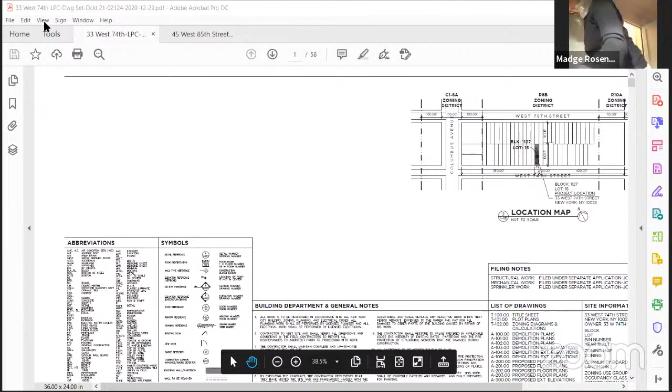So it's 33 West 74th Street. It's a brick and stone townhouse, built originally in 1889 as a group of 5, I believe. It's pretty notable, it's the building that has the wisteria growing up the facade of it. Our application is pretty much we're doing a full renovation of the house. We can convert it from a 2-family to a 1-family townhouse.

As far as exterior work, we'll be replacing windows on the front facade, changing the type from double hungs to casements. As mentioned, we're proposing a roof bulkhead to bring the stair up to the roof and have a roof terrace. Also on the roof, we'll be locating mechanical equipment up towards the front. This building has a very high parapet, so we'd be locating mechanical equipment behind the parapet. On the rear facade, we'll be reconfiguring openings and installing new wood casement windows, as well as steel casement windows for a bay window. This is all in addition to a full renovation of the interiors of the whole building.

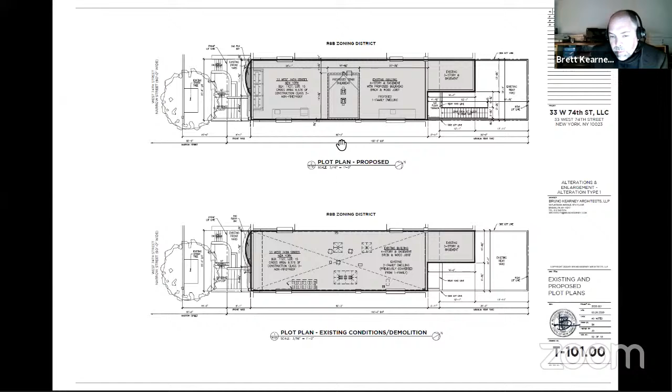If I could, you can go to the next page. This is the proposed plan, existing and proposed plot plan. In the upper plan, you see where the proposed bulkhead is located. It's set back about 26 feet from the front facade, so it's towards the middle of the building there. You can probably go to the next slide.

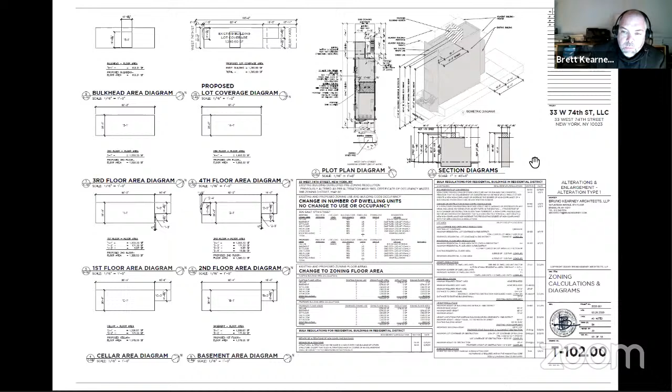This is just the zoning calculations for the building. The 3-dimensional isometric diagram in the upper right-hand corner shows the size of the bulkhead. It basically matches the height of the adjacent bulkhead on the property to the west, shown with a dotted line. Our bulkhead has a hatch pattern on it, and the adjacent bulkhead is there. Below that, the section diagram shows the sightline diagram from across the street. According to the sightline diagram, it would not be visible from the sidewalk or the street.

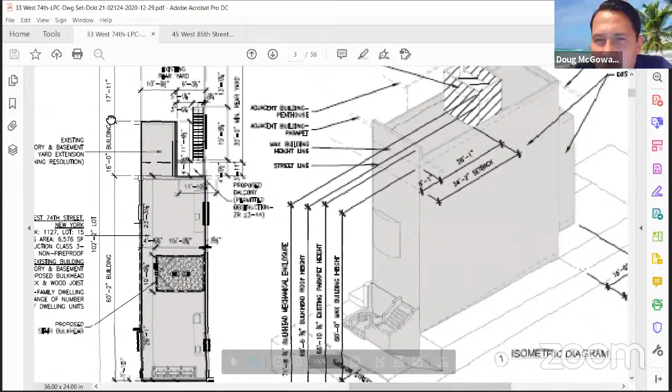Mark, could you zoom in on that a little bit so we could get a look? You said the diagram shows that it's not visible from the street. I'm having a hard time seeing it. Yeah, just scroll up a little bit more. I gotta, something funny happened there. Give me one second.

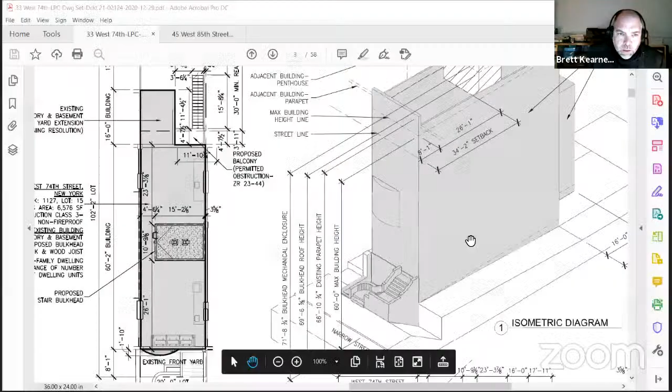So the parapet goes how much higher than the line of the building? It's about 5 to 6 feet. And we're kind of going to adjust the roof line to get a little bit more height, lower the slope of the sloping roof a little bit. Right now there's some bracing on the wall; we're going to take the bracing out and replace it with a steel structure that will act as both bracing and dunnage for the mechanical equipment. So basically the mechanical equipment will be right up against that.

Do you have a mock-up up there? Because I was there today. Yes, yes. I didn't see it. I couldn't see it from either side of the street.

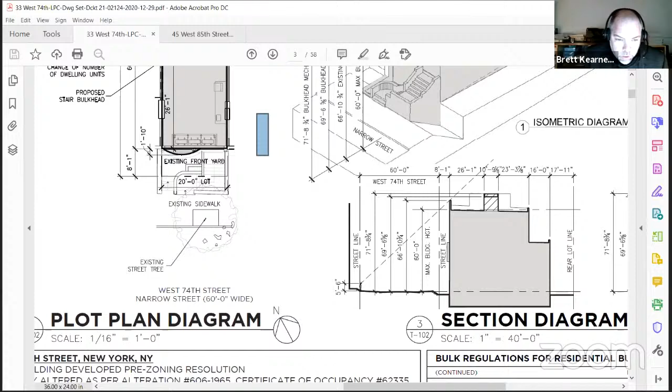No, there's photos. We built the mock-up a couple of months ago, and Landmarks never actually came out to see it. We photographed it, and then with the bad weather, we had to take it down. Well, it's still up - the frame is up. We took some of the plywood off because of the high wind alerts from the building department. I submitted photographs of the mock-up as part of the package, both from the street and from up there so you can see it.

So that's what's on the screen. There's the diagram - you can see between the roof and the top of the parapet it's about 5 to 6 feet. And that's from the other side of the roof. So the parapet is 5 or 6 feet? We have another section further down with more detail. It's a fairly wide building, right? Relatively - it's 20 feet wide.

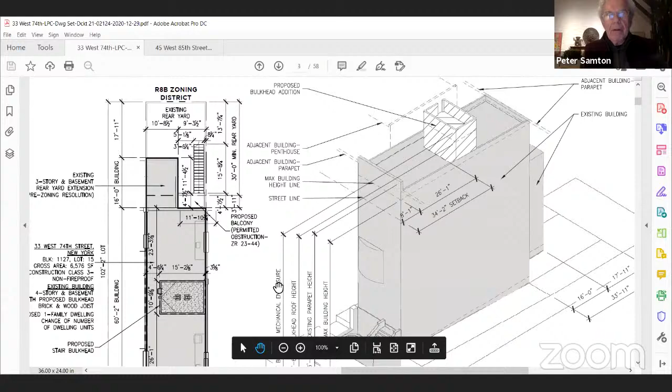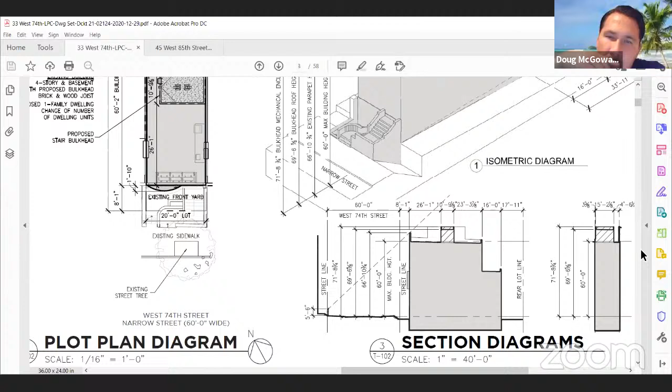How high is that new bulkhead? It doesn't give a dimension. Peter says 71 feet, 8 3/4. So the building height is 60... No, I mean from the roof to the top of the new bulkhead. That's about, let's see, 11 maybe 9 feet. 11 foot 8? So I'm calling out to the top of the parapet - 71 feet to there, it's 11 to 12 feet. Not to be picky, but is it 5 or 6, or 11 or 12? There's a measurement - it's either 11 feet, 8 and 3/4 inches to the parapet, which we're required to have either a parapet or a railing on top of the bulkhead.

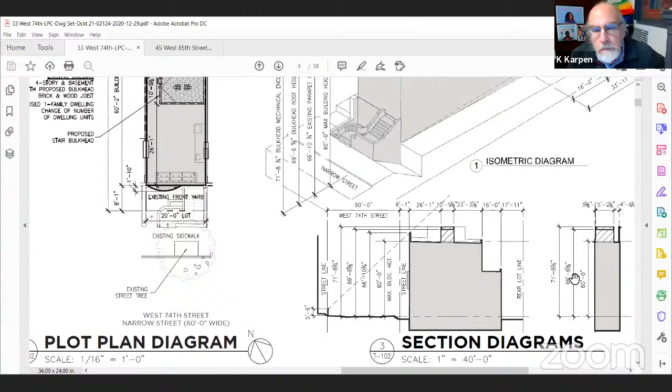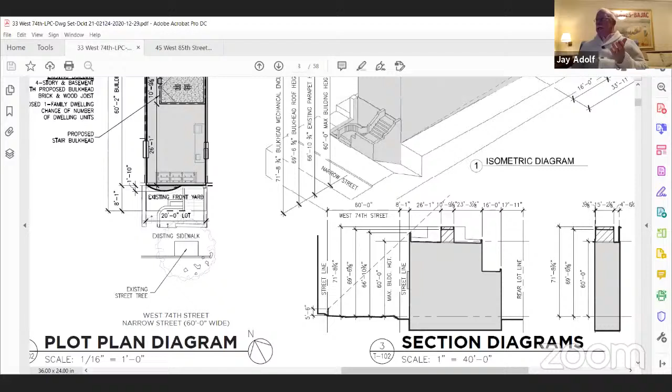So the roof line is actually 9 feet - looks like 6 and 3/4. Correct, so it's just under 10 feet to the roof line, and then the parapet adds another couple of feet. It's either a parapet or a railing - we don't have any equipment up there, just some ventilation on top. So did you answer the question about the height of the bulkhead from the roof to the top? It's 11 feet - you could take the measurements and subtract. So is it 11? The last I heard was 11 foot 8 3/4. Brett's figuring it out, looking at the drawing and calculating. It's 11 feet, 11 to the top of the parapet on the bulkhead.

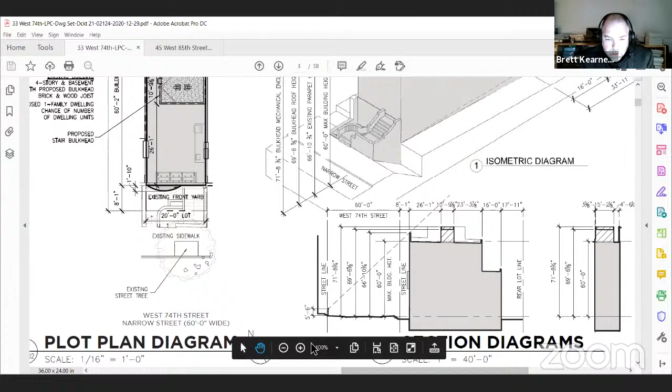So we can scroll back - is that specifically for an elevator? No, it's for stair access. But you will have an elevator in the building as well. Yes, but the elevator is not going to the roof, it's only going to the 4th floor. That's the top floor. But if it's for stair access, why do you need 11 feet?

That seems very high for access to a stair, which normally you'd need about 8 or 9 feet. Well, we have about 8'6" ceiling - let's see, we have a 9-foot ceiling there, and then a couple feet for mechanical ductwork above that ceiling, because we have some exhaust ductwork going above that ceiling into the roof. And then we just have a foot, or a 21-inch parapet around the perimeter to hide some of that ductwork.

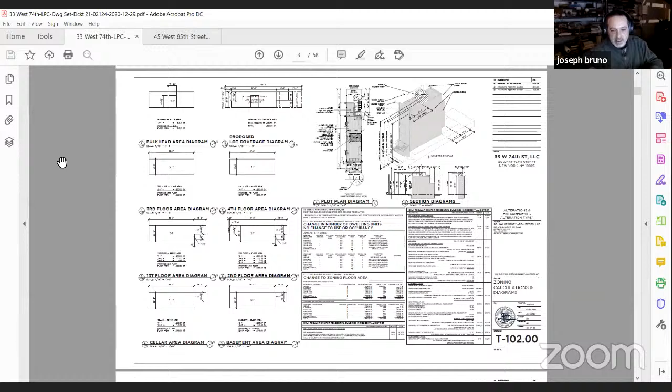What we were trying to do is match our parapet height, our total bulkhead height, to the adjacent bulkhead on the building to the west of us. We actually have the tallest parapet of all the buildings - both adjacent buildings have a little bit lower parapets or street facades. It looks like all the buildings were built at the same height, and then the parapets vary. The building to the east looks like it was modernized and had a cornice removed at some time. Do you have an east-west section?

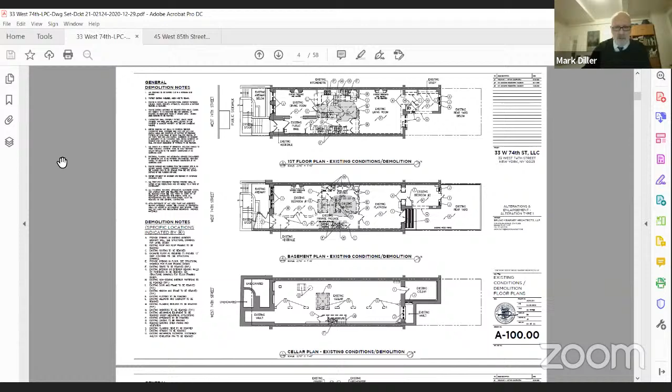Yes, if we go through the drawings now, we can show you in more detail. Do we need the floor plans here? Looks like that's interior, it's all interior here.

This is a demolition plan, so these are areas that are going to be removed. This is the only actual window on the east facade of the L extension, is that correct? Correct.

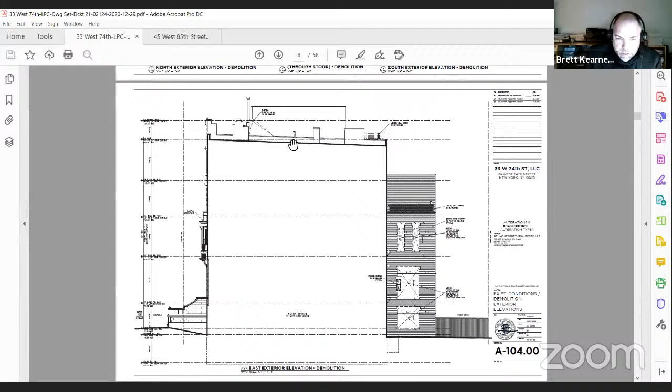And yours will be set back quite a bit more. Ours is in the middle of that. Yeah, we have a drawing for that, the reverse view.

So again, that's the demolition, again showing our existing stair bulkhead that we're going to remove, and the existing chimneys and everything on that that we're going to modify. And these are the proposed plans.

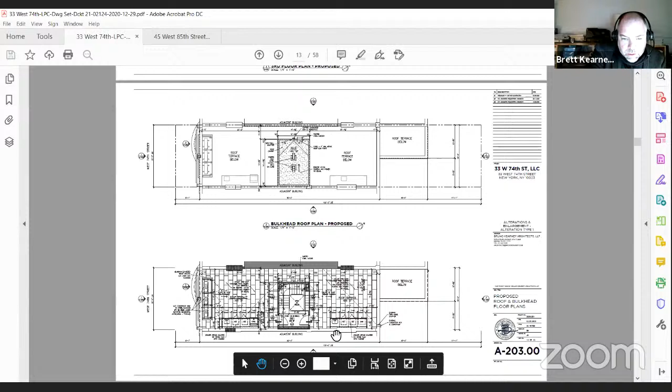On the left-hand side we're showing the mechanical units up against the parapet wall on its own dunnage. And I think we're also showing a couple of exterior kitchen cabinets, stone or whatever materials. And then the top plan is a roof plan, you can see the footprint of the roof bulkhead.

So you're building an outdoor kitchen on the roof? I'm confused, what are these kitchen cabinets? Oh, they're not kitchens, they're just like a wet bar on one side, and then a grill on the roof. And you have a sink too on the other side, isn't there? Yeah, we have a sink and then a gas grill.

Show us where the gas grill is going to be. It's on the south side, on the lower plan. Oh, I see it down here, grill, ice, and none of that's visible.

It's because we're actually lowering the roof elevation. The roof is sloped front to back, and we're lowering it in the front. So as we're dropping the roof down, we're building the parapets, leveling off the parapets on either side, extending the chimneys up per code. And then those little kitchenettes, or wet bars, they're going to be dropped down behind the parapets that are the shared party walls between the buildings.

So you're going to have cabinets, a sink, and a grill, ice maker it looks like. And again, you'll see in the 3D drawings that nothing's visible, it's all dropped down.

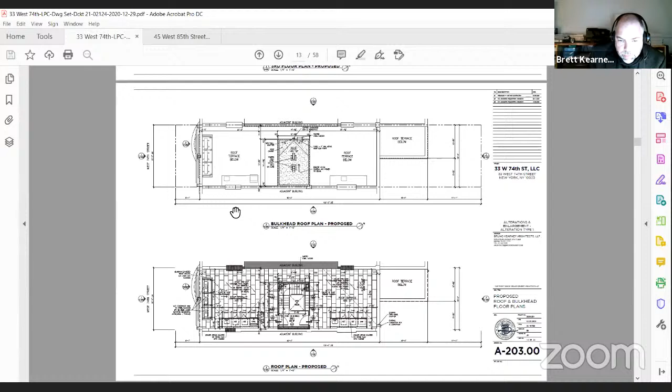Okay, where are we going? So going to the next slide. Okay, so this is the elevation.

Again, same format, the rear elevation. We're showing the bulkhead in a copper clad standing seam panel, and then with the steel, uncoated. It'll oxidize and turn green over time. And then steel doors and side lights.

Again, on the front facade, you can see just on a straight elevation how much of the bulkhead is visible, this is the upper portion of the bulkhead. And then here you can see the windows, the proposed windows in the front. No physical structural changes to the facade, just restoration work, and then the changes to the windows.

Is that a new railing in the rear on the roof? Yes. No. So tell us about the changes to the windows, please.

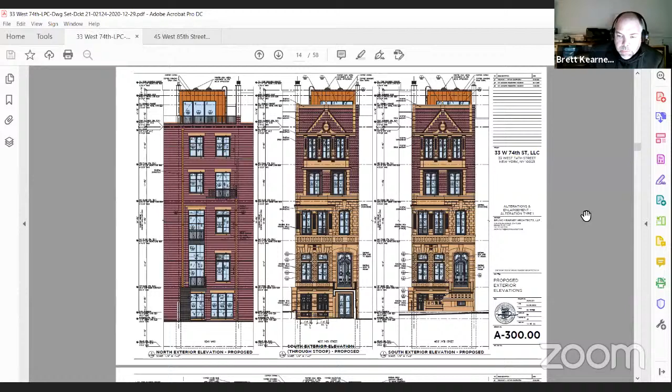Could we, yeah, do that because this - you can skip ahead. Mark used to live on this block. This is one of the nicest, well-maintained brownstones on the block.

Got it, thanks. It's not maintained that well. I used to live there 2 years ago. Okay, yeah, the family was in the house for, I think, almost 60 years, and the father passed away recently, I think he was in his 90s.

All right, so again you see the bulkhead. We're showing, we want to show the parapets leveled off, so you won't see the roof work or the cabinets that we're showing. Again, what Joe mentioned, we're going to move - we have to build up the chimneys as per code because they're actually functional, active chimneys. Okay, we can go to the next slide, I guess.

This is the other side. Again, see on the right-hand side, we're showing that's where the mechanical units are. We're showing a louvered cover, a louvered fence around the mechanical units. But the chimney, is that the existing one or you're adding to it? We have to extend it up by code a certain height to allow for the ventilation.

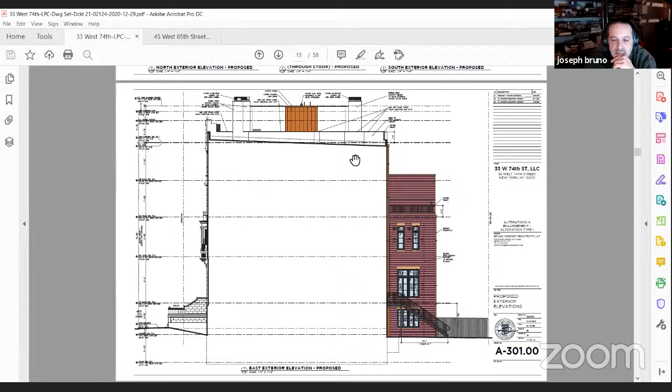Again, we can skip to the renderings next page. That's again just the view of the proposed steel doors and side lights on the bulkhead. I can go ahead and we can go to these, these are just details of the doors and windows.

Are these the existing windows? Those are the existing windows. And is this on the front facade or where? Front facade. Well, the one on the left is the rear facade, the one on the right is the front facade, the first floor, parlor floor, which doesn't have divided lights.

No, I think that's the replacement windows. But this doesn't look like a double hung window to me. That's why I'm asking - it's uneven, and the meeting rail is actually at where the stone is. If you look at the detail to the right, it's a weird window. I've never seen anything like it before, but yeah, it's an uneven double hung.

So where's the meeting rail? Is that where it's behind the stone? If you look behind the stone, yeah - see the section right here on the right, head sill detail. Yeah, there. So it's in here? Yeah, it's an uneven double hung window. This is all one window, where it's two panes offset - two sashes, yeah.

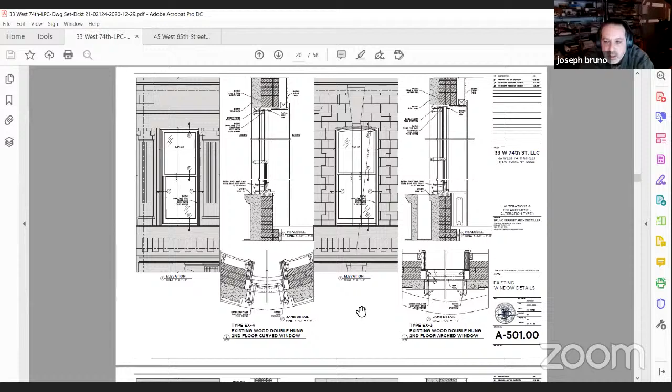These windows, correct, and the bulkhead - because you're not replacing them in kind. First of all, they're casements, and are you replacing... it looks like you have curved windows in that bay. Right, yes, they're curved, existing. Are the replacement windows curved? In that bay, yes, we're proposing curved windows. Actually, the windows are not curved, I don't think, right Brett? They're flat windows in the curve.

Are they curved? Can we get to a rendering? Yeah, sure - new or the old? You want to go ahead? Skip ahead, always here. Both, tell me where to go. Keep going - there, so there are the photos. Here are the photos. Okay, so...

What should I zoom in on? We can start, I guess, number 2 - yeah, right, which one? Why is this moving? That's the bay there, that's the bay window on the second floor, and they are curved, and we're gonna change them. We're gonna do curved casements instead of curved double hung.

So a general question on the windows - are the casement windows that you are proposing to install historically accurate? Well, the building right next door, built at the same time, has original casement windows. You can see to the west - that's your frame of reference? No, on the lower level. If you go to the lower level, on the first floor, the building right next door to the west. And there are other examples up and down the block of casement windows in similar brownstones.

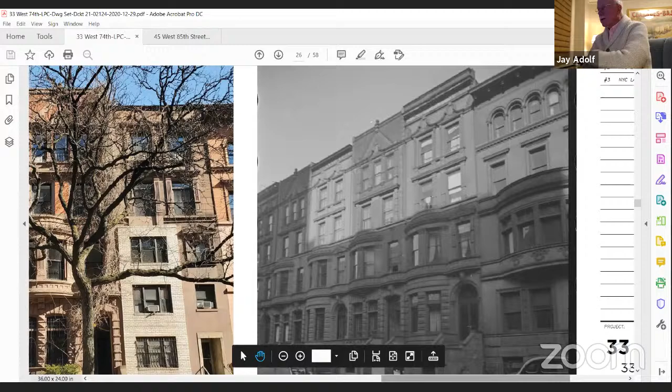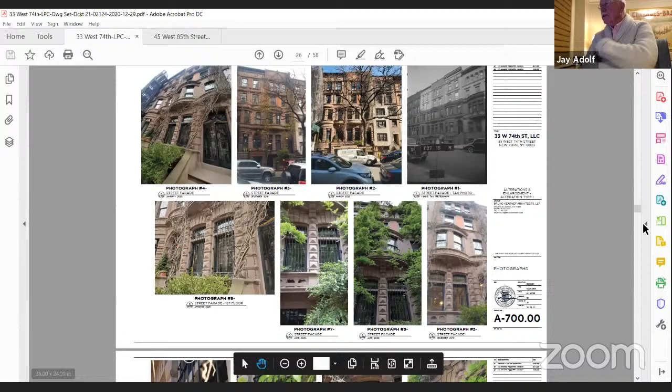Is that a yes? Yes, yes. Okay, so you're changing - it's fair to say you're changing, or you think you're changing, the original configuration of the window. We'd like to go to a more traditional kind of casement, divided light window. I just wanted to establish - the client is... I just wanted to establish, to the extent you can, whether the proposed windows are in fact not the original configuration, and you believe that that's the case? Yes, the proposed are different? Yes, correct. Yeah, that's it. Okay.

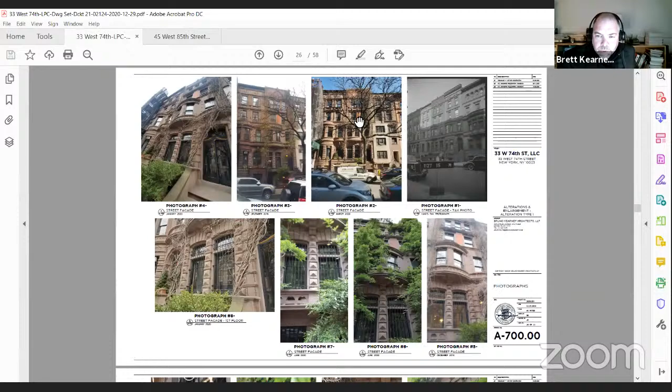Okay, so if we go to the next page, I think it's just more photographs - more of the existing condition still, the existing conditions that we can go through.

And this is the back facade existing conditions. More double hungs, 1/1s. In the lower left and upper left, you see there's these little bay windows on the first and second floor.

Actually, what we're proposing to do is connect them, extend the window at the first floor down to make it a door, and extend up a transom above it, and connect the brick at the bay to make it almost like one bay window.

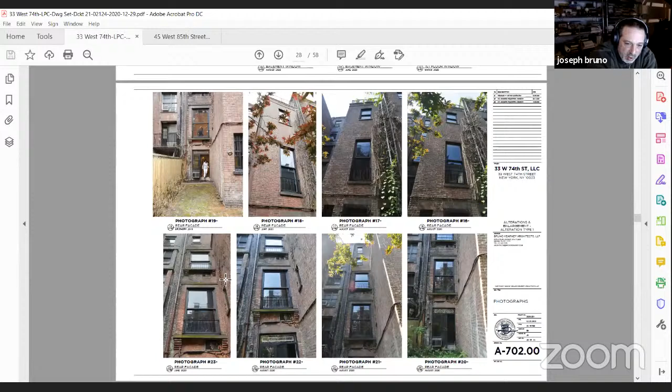Are we talking about here and here? No, between the photo below that, number 23. That's the first floor, and there's a bay above it at the second floor, kitchen, and then there's a master bedroom above it. We're gonna connect, there's gonna be a balcony off of here with a staircase to connect down to the garden level, off of the first floor kitchen, down to the basement garden level.

And then we'll go back to the drawings, or you can see we're in the rendering. On the second floor, with the master bedroom, we're gonna convert that to a door, from a window to a door.

It's about a 20-inch sill right now, I think. It's pretty low to the floor. But we want to drop it all the way to the floor with the little Juliet balcony, with the in-swing casement door.

So this is what you're calling a bay window? Yeah, and corbelling this out. Yeah, I noticed the corbelling here. It's harder to read here. Are you preserving the corbelling?

We're extending it down because we're proposing a balcony at that level, and you see where that air conditioning opening is, that's basically the floor level on the first floor, and again, it's the same thing there. So there's gonna be a balcony at that level, and we're showing the brick building out all the way down to that balcony level.

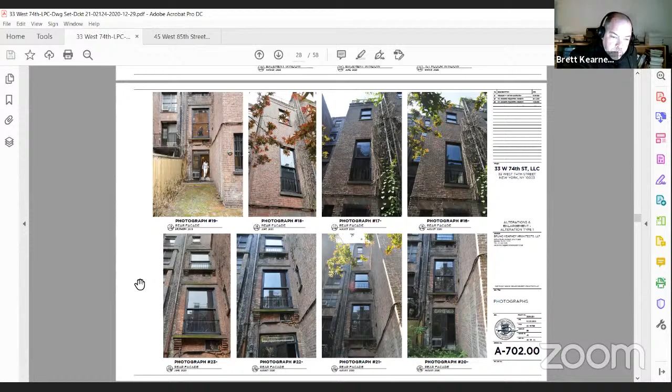Taking out the sill here for this window, and making that a door, with a staircase and corbelling down to the back, to the garden level. Yeah, correct. Can you show us the drawings?

Yeah, we can. Should I go forward? We should go forward and see the renderings, then we can go back to the drawings if you want. Mark, you were going to say something?

Sorry, I'm just trying to get a sense of what's going to happen with this decorative corbelling on the parlor and second floors.

That's gonna maybe be built out. We're gonna rebuild the brick there, and the corbel is gonna be subsumed in the brick pier that we're building out. So the corbelling is going to go away. Yeah, because we're adding a staircase, a balcony and a staircase access to the rear yard from the first floor.

Understood, but that might also be one of the reasons why this is going to public hearing. Well, none of this is visible from the street, all of this is in the interior courtyard of the building. You'll find that's going to be an interesting conversation with this group.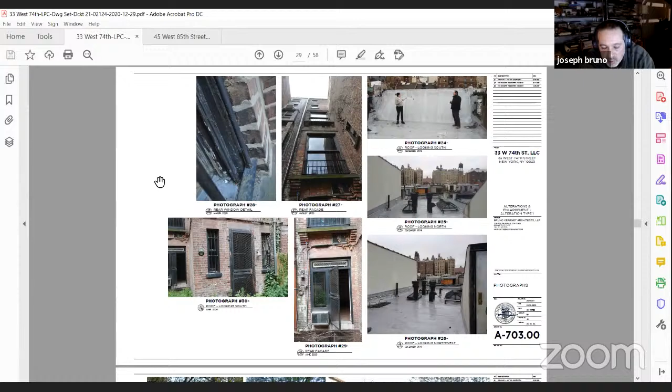What is that room where you're creating the door? Is that a living room? The kitchen on the first floor. The ground floor is recreation, living room, family room. I'm asking about the first floor where you're taking out the window, kitchen, creating a door. So it's the kitchen. The door is from the kitchen out, correct, to the staircase down to the garden.

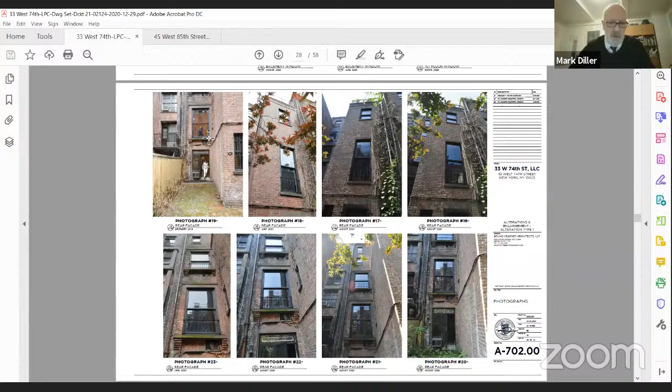Where should I go now? Should I advance? Yeah, keep going, thank you. Wait, okay, go back, if you can go back, you get an idea of the scale on the upper right, number 24, you get an idea of the height of the parapet wall in the front, the street wall, and we're actually lowering the roof, so it'll be even taller.

And then in the middle, you see that is the neighbor's bulkhead, that we were matching that height, or penthouse. Penthouse. Okay, advance to the next.

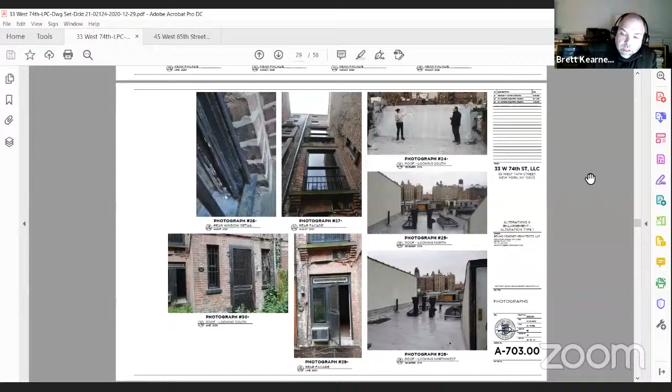Is there any side-by-side picture of the old windows, old facade, versus the new facade? I don't think so.

And... shall we keep going? Where are we going next?

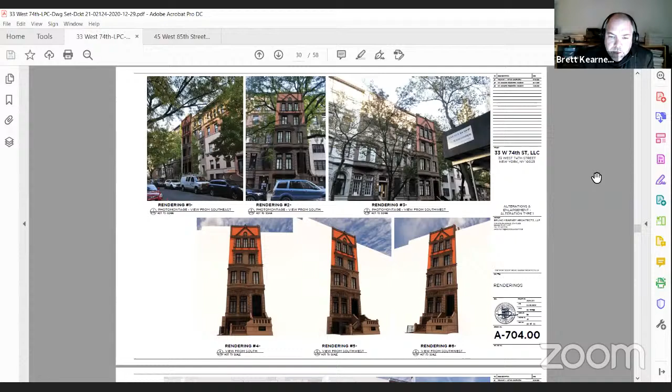Are you proposing an orange or brick color, or is that just a rendering? Oh no, we're not changing the brick at all, that's just the rendering printing a different color.

Okay, so the rear facade. You can see what we're showing. We're just talking about the proposed...

stair and balcony. What if we zoom in on number 2, you can get a better idea of rendering number 2 - you can get a better idea of the stair and the bay window.

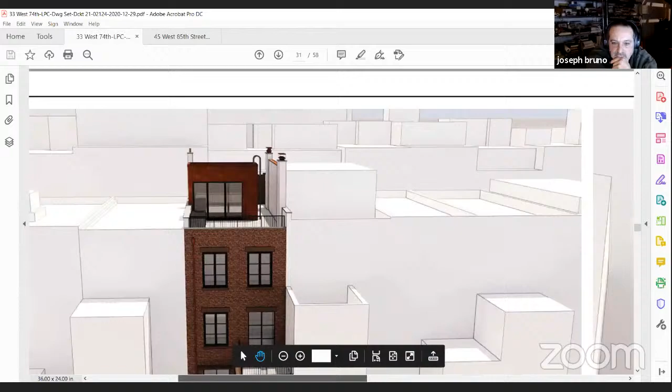Oops. Yep. There we go. I see. There we go, good, oh wow. Stop. So, okay.

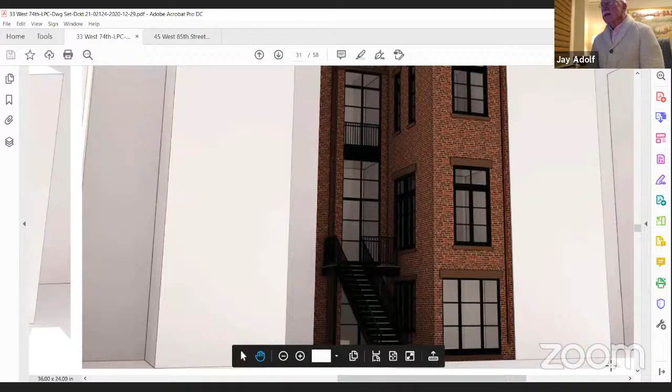So the door is going to be a French door with divided lights? Yes, correct. And the doors and transom, and what I'm calling the bay, those are steel frame doors. It's not really a window, sorry, it's not really a bay.

We're just using the plane of the existing corbel as the plane for that, from the first floor to the second floor. We don't want to subtract - we want to use what's there and not demolish it.

Those two windows are not coplanar with the rest of the building, and rather than totally remove it, we want to use that existing corbel to infill. Yeah, basically this sticks out.

Is that an accurate rendering of the masonry on the rear facade? It's all existing - we're just going to repoint it and clean it up. So it's all brick? Yes, all brick.

For the new openings - we showed that in the demolition drawing, where we were proposing new openings - we're showing cast stone headers or cast stone lintels to match existing.

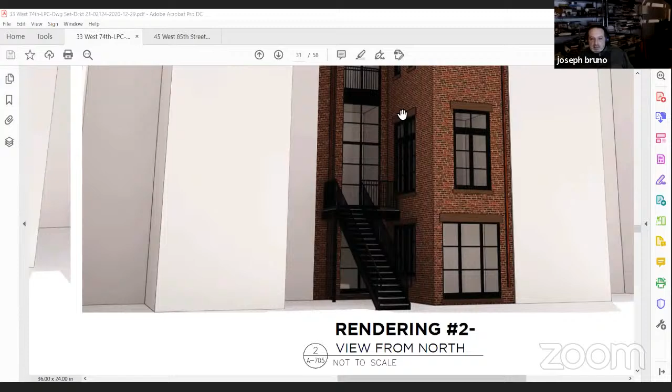Those are new openings? Yes. Which ones? All the headers and lintels will match the existing stone that's there now - they'll be replaced. Can you tell me which of the openings are new? All of them, basically, right?

Well, we were reconfiguring. On the bottom floor, the basement level, there's 3 openings there - we're making that one opening. We're taking out 2 intermediate piers on the back, all the way to the back, to make that one opening. On the side of the rear yard extension, those are all new openings.

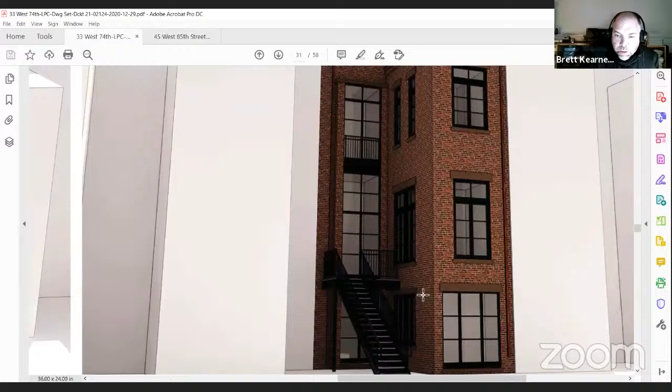As we pointed out earlier, there's one small window there - we're making 3 or 4 new openings on that facade. And as we were talking before, we're connecting the openings at the first floor and second floor to make that more continuous glazed opening, where the stair is.

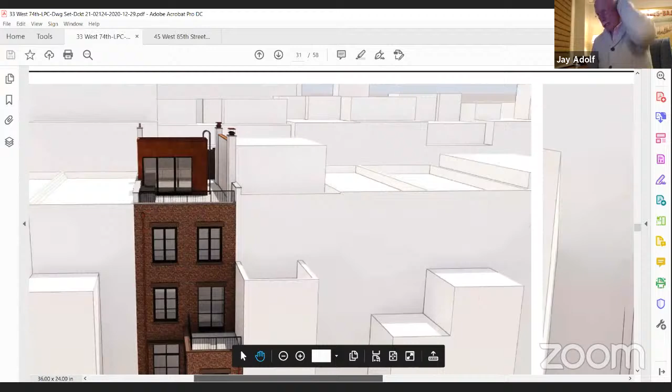All right, am I moving forward? And the openings showing to the right of the stair on the rear facade - are those new, existing, or reconfigured? Further down, on the first and second floor?

So you have the basement, first and second floor windows - this will change, not those to the right.

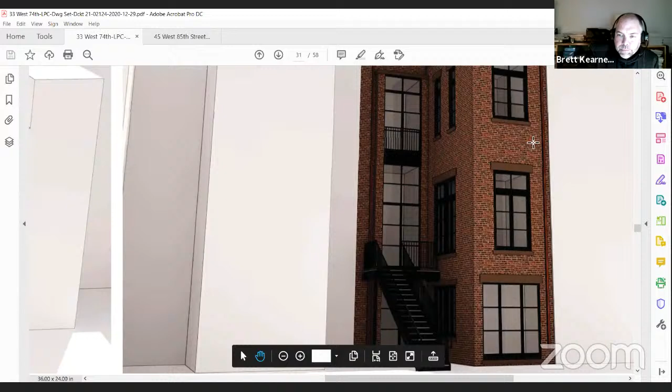Not those, keep going. Now, those three that are showing - are those existing openings? They are, but on the back wall - yes, all those openings are existing.

On the lower level, we're removing the two intermediate piers because there's two side light windows and a door, so we're just combining and enlarging all that into one opening - enlarging it, not making it physically bigger in terms of width, but removing the intermediate piers.

And then the windows above, we're just enlarging them. We're not changing the width, we're changing the height - making them a little wider, slightly.

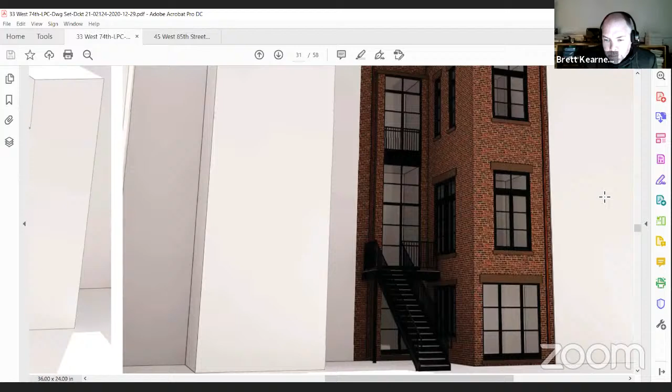Okay, what's next? We go to the next page - let's look at the rooftop renderings.

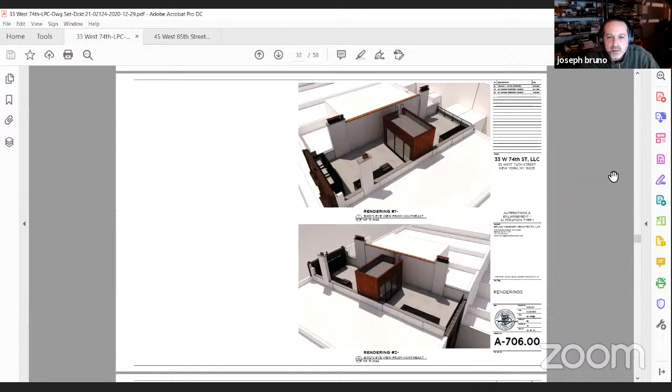So that's the rooftop again, and the upper one shows it from the southeast. You can see the lower left is the front facade. We're showing the mechanical units and the steel dunnage and bracing of the parapet.

And then you can see the three chimneys we're raising, and the proposed bulkhead. This reads red, but that's the copper you were talking about? Yes, copper. But are all three chimneys new? No, they're all existing chimneys, but they have to be extended because of ventilation requirements, because we're creating a usable roof.

Including the two on the west wall? Yeah, they're existing, being brought up. Are they the chimneys for your house? Yes, those are our house, our chimneys. So you have three chimneys total. The third one is the neighboring chimney, and we're required by code to bring it up and extend it.

Every time you build on the roof, even if it's not your chimney, you're responsible for raising it per code. When the neighbor built this thing, why didn't they raise the chimneys then?

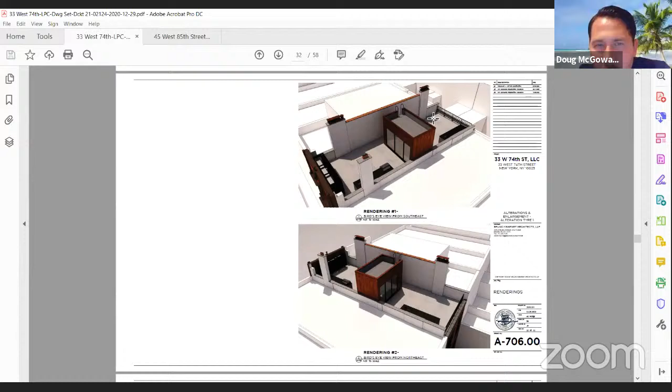Well, it has to be a certain height above their roof as well. Right, I understood, but I'm talking specifically, I thought where you have the copper that was going to be the same height as your neighbor's penthouse. The top of the wall, I don't know if it's just the way the view is, the roof looks lower, maybe it's the different materials or the angle, it may look not the same, but it is.

It's supposed to be the same height. There's about a 4 foot, 3.5 foot gap between the two buildings. Yes, there's a gap between our penthouse there. So you're not seeing it correctly, it's the perspective drawing, but it is the same height as their parapet. Oh okay, you're right, Doug.

It's not joined. Are there any side-by-side existing versus proposed drawings we could look at? Of what? Of the roof, all three areas: the front, the back, and the roof. I mean they're not side by side, they're on different sheets. Okay, we can go to those.

Can I ask a question about the chimneys? I'm a little confused, sorry. So the two chimneys on the west are the neighbors' chimneys? No, those are ours, our active fireplaces and boiler flue.

Okay, and then the third chimney, that's their chimney. What's the street address? 31? That would be 31, yeah. That's their chimney, their active boiler chimney that we have to extend up.

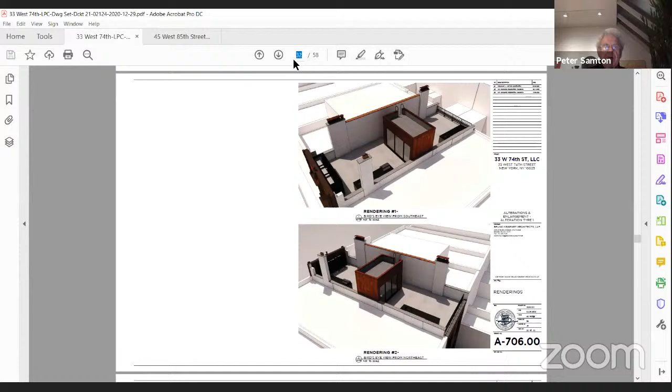We have, how many fireplaces do we have in the house, Brett? We have 1, 2, 3, 4, 5, 6, 7 - front and back. I think we have 7 total fireplaces plus the boiler flue in the front.

Are those bedrooms in the front? On the first floor is a dining room. On the lower level, on the basement, it's a maid's bedroom. If you go back up one sheet to 200, that is a maid's bedroom with an existing fireplace. And if you go back to 201, you'll see we have a dining room on the first floor, and then we have a library on the second floor.

And if you go to the next sheet, 202, that's where we have a bedroom on the third floor, and then on the third floor we're removing a fireplace and creating a master bathroom and wardrobe. And then we have an existing fireplace on the fourth floor.

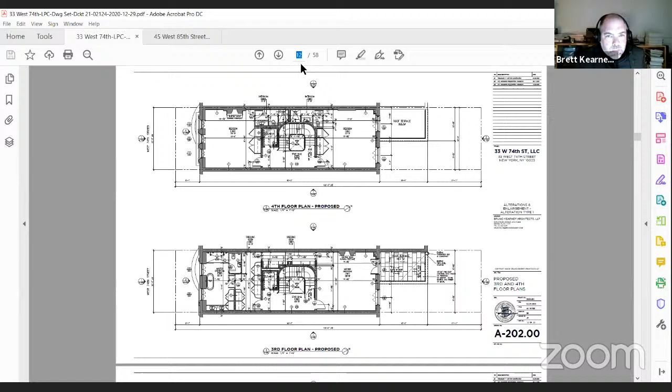So rendering number 3, you can't see the chimney. It's set back about how many feet, Brett, from the street wall? About 10 feet. You can't even see the penthouse of the other house.

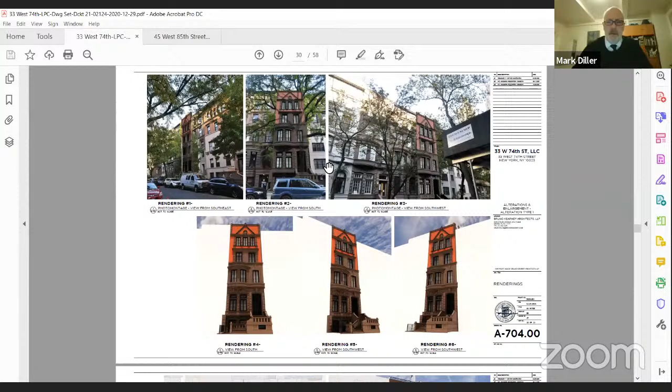Okay, where are we going now? We left off at 32, I guess, and then 33 is just the roof level views, showing the bulkhead and the mechanical enclosure. The mechanicals are behind a decorative type fence. Yeah, a louvered fence. Okay.

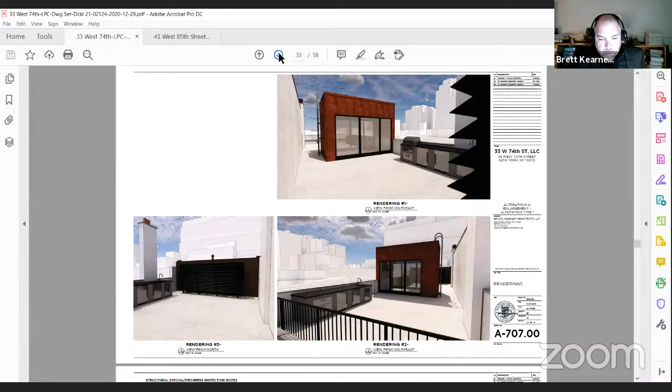And where am I going now? I think that's all. I mean, the rest of the sheets are all the structural and mechanical. We can probably go next to page 39. You see these were the different openings we're making on the facade, the rear facade. And then I think...

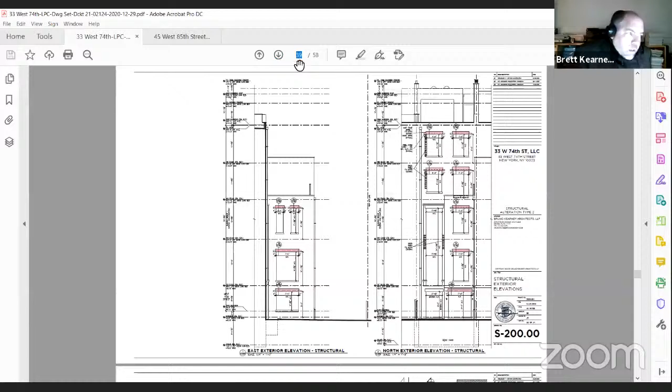And then just page 53. Again, that's the roof level mechanicals that we talked about. There's 3 units behind the parapet, and there's just a couple pieces of ductwork on the top of the bulkhead, goosenecks at the top.

Hey Brett. Yep. The east chimney, did we make it that height just to match the other chimney on the west wall, or do we need to legally be at that height? Could that chimney be a little bit lower and then the chimneys would be different heights? I forget what we did there. We made it the same height, but I can double check the calculation. It could be a little lower.

Yeah, it might be able to make that other chimney a little lower. The chimneys on the west, they have to be 2 feet higher than that existing bulkhead or existing penthouse. Here, since that chimney on the east is further away, more than 10 feet, we probably can be a little lower. Yes, we just made that the same height, but since it is more than 10 feet from our proposed bulkhead, yes, it could be lower.

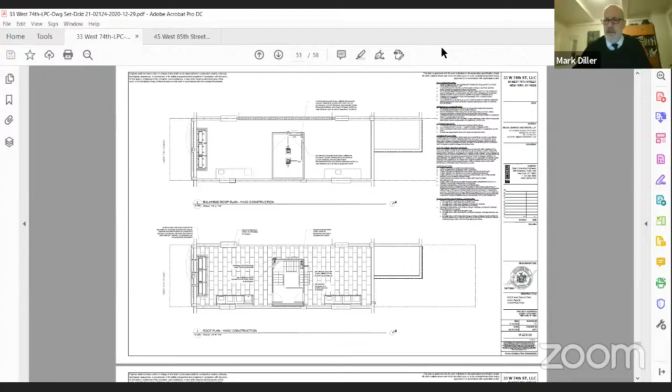Okay, I think that's all we could unless you have more. All right, so should I stop screen sharing for a minute? Would that be helpful? Yeah. All right, because I'm still trying to get, I'm sorry, chairs.

I'm still trying to get my hands around what it is that we're being asked to opine on. It strikes me that one thing we're being asked to opine on is the substitution of casement windows with divided light that does not look like 1/1 windows on the front facade. And it looks like they're up and down the whole thing.

They're all consistent with each other, but not with anything that's there now. It looks like there's fenestration in the back, both on the eastern face of the L extension and on the backward facing, or north facing facade. There's elimination of some corbelling on existing windows, and it's not clear how much of that is going to be preserved. It looks like there's a little bit of window framing on the inset windows that's proud of the main facade, and that's being unified as if it were a pilaster, bringing the windows out to that plane. And then there's the stair landing bulkhead with some other accoutrement on the roof.

Is that it in terms of what we're being asked to opine on, or is there more that we should be talking about? No, that's pretty much it.

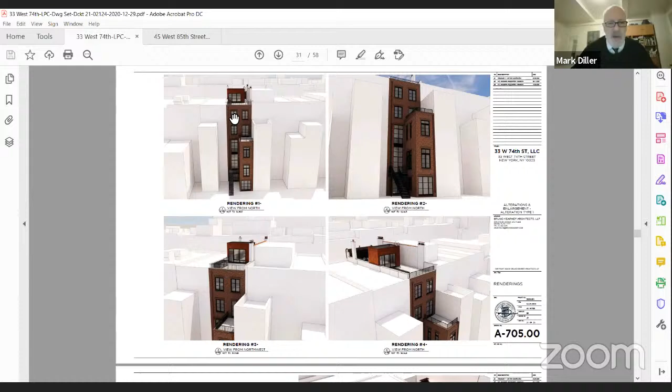That's where I'm going. Lots of times with these applications, what we look for and what LPC looks for is... right, here it is. It's all kind of blank, so it looks like you're preserving the plane of what's next door. But oftentimes the punched windows—I'm not sure if these punched windows are getting bigger, and how does that relate to the punched windows that I'm presuming are on either side, or maybe there aren't punched windows anymore on either side?

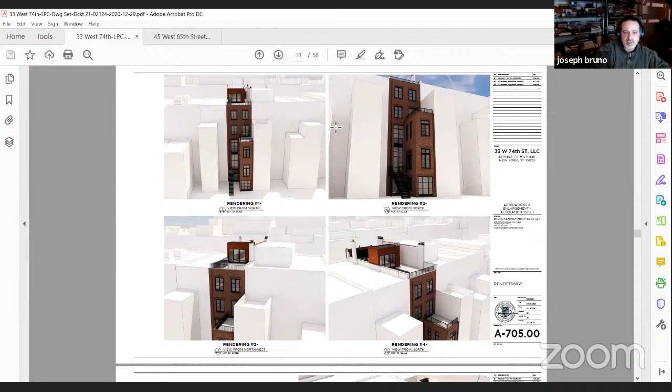There aren't any. We have some photos from the rear yard that we can share with you. They weren't in the presentation, but let me just double check. It would help so much if we had some side-by-side pictures of the old and the new. Yeah, that's really hard to follow here. Anyway, chairs, that's my best shot at trying to clarify that.

Is there a way to share? Well, we have photos from the rear yard, is there a way for us to share them with you right now? Yeah, can we see them? Sure, you should now be able to share. Great, all right, let's focus first on the rear yard since we're going there, so we're not all over the place in our discussion. Actually, we do have photos in the presentation. Can we go back to the photos again from the rear yard?

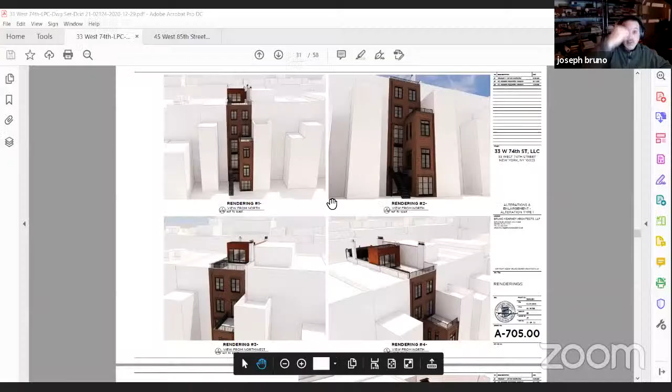And they did basically something similar to us, what we're proposing, or may have. They have the same kind of bay window or continuous opening situation. Corbelling, right. Yeah, they have the corbelling. They maintain the corbelling below, but they don't have the same break between the first and second floor. It's more continuous between their first and second floors.

Are these two coplanar? They don't look that way. Yeah, I mean, yes, it's weird because the windows don't seem to line up. Well, they are—it looks like different elevations, but their corbels and our corbels are on the same planes, and the wall that the corbel is built out from is in the same plane.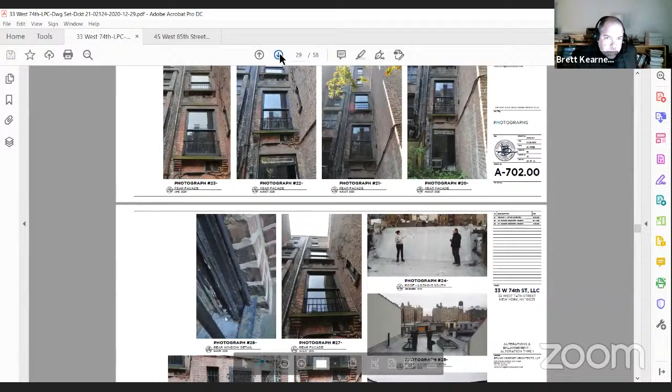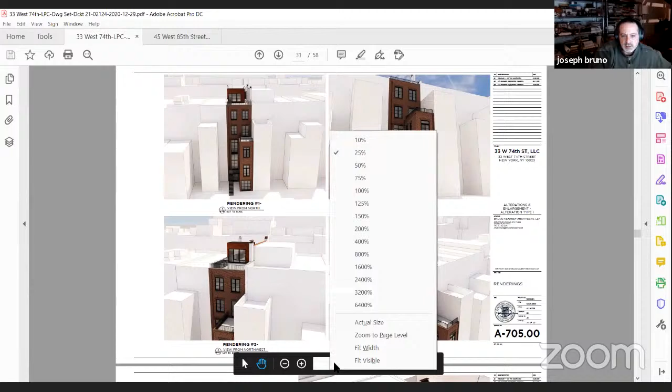What was the number? 32, 33, 31? Rendering 1 and 2 will give you a better idea. That's better, too. Okay.

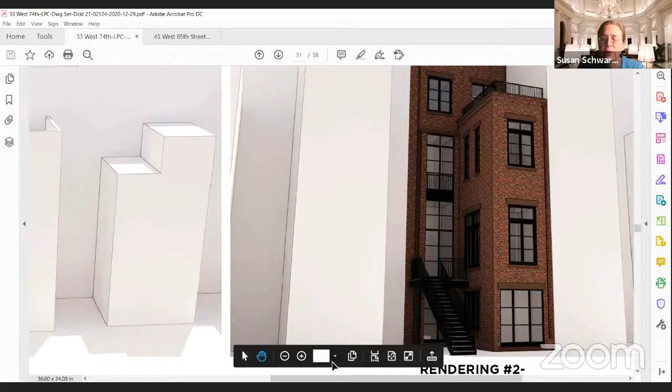I'm sorry to be so dense here, but can you just say very clearly which of these windows are new? They're all new, all of them. Which of these openings are new, on the extension that sticks out into the rear yard, the windows facing east, next to the stair, all of those. Right now there's only one small opening in a powder room on the first level, second level.

So that's gonna be on the first floor, is it a library or a little den on the ground floor? And then on the second floor, is that the kitchenette, basement-like level? On the first floor it's the kitchen breakfast nook. And on the third floor you have a bathroom, which is an existing bathroom.

Can we get to a discussion? Yeah, can we conclude it? Are we done, or should I get rid of the screen share? Okay. It's a lot of work. Thank you. All right, any thoughts about the project, the rear facade? First of all, pluses, minuses, questions.

Objections, everything okay? I think Landmarks is going to ask about the corbelling. From what I know about our recent contact with Landmarks, I think they're going to be less interested in the rear at this point, and I don't think we should spend a lot of time on it. There's been a tendency to focus on the front and the roof, and I think that's where we should also focus our attention.

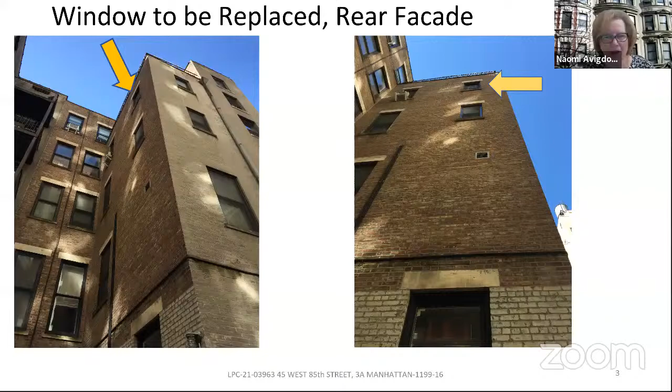So this is the facade and the window that I want to replace. The right picture is the east facade, and the left picture is the east and two north facades. And this is the specific window.

And you're gonna do something else with this stained glass, right? Yes. The problem is that this window is in the bathroom, in the shower stall. I'll show you a picture in a few minutes when we get there. So I need ventilation in the bathroom because of humidity, and it's terrible.

So what I propose is a double hung window where the top pane is an aluminum sheet, and I will put a vent into it. I have another window where I did the same thing in the basement for fresh air for the basement. I'll show you the picture when we go forward.

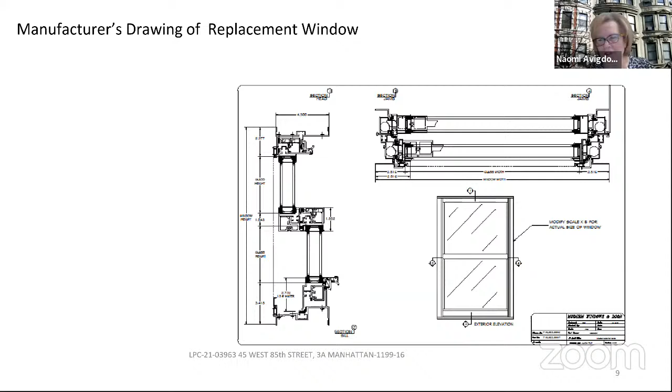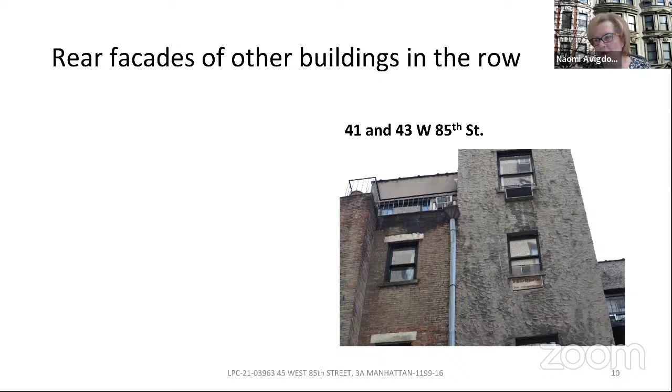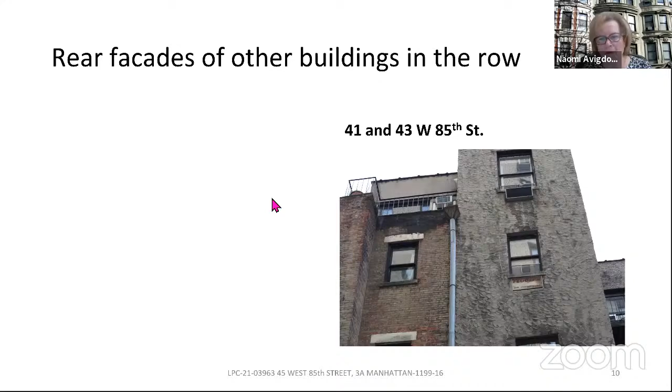Well, I'll show you in a minute. Can I just show you something else? Okay, sure. So these are pictures I took from 10 West 86 and 20 West 86. Unfortunately I didn't write down all the addresses of each window or which building it's on, but you'll see the condition of the windows in the back of my neighbors basically. I know these buildings are 41 and 43 because I see them from my building, but the rest I don't know which building it is, though it's right next to me.

So you see how people made windows bigger or narrower, weird. They put holes for air conditioners. They blocked windows—you see how this one is completely blocked, bricked in. And this one is another stained glass window. I think I saw three stained glass windows, besides mine. So basically I'm showing you what happens—there are no stained glass windows left. There are three windows out of probably at least 100 windows on that facade on the back of 85th Street in that block, and I saw three stained glass windows.

So are you the owner or architect or what? I'm the owner. Wonderful. Again, this is the same picture, the map that shows where I took the pictures and where the building is.

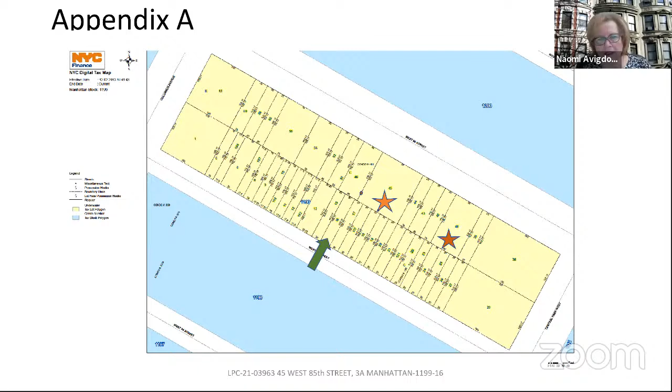There was another picture, I forgot. No, that's it, that's the last picture. So there are other solutions for the ventilation, like making a hole through the brick and putting in a vent. But I think it's more painful to break the brick than to change the window, to me, beauty-wise or conservation-wise. I would feel bad breaking the wall, the brick. But if you don't let me, I will have to do it.

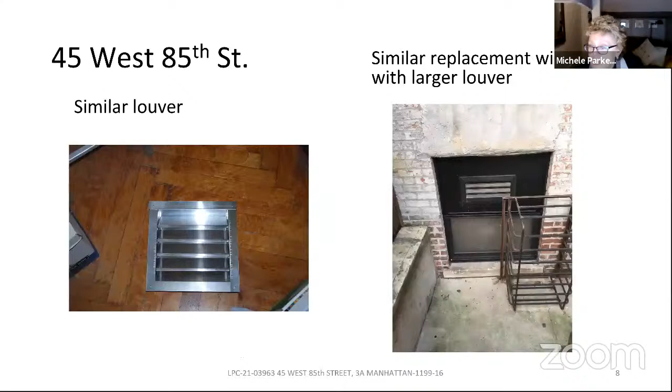Well, we have a stained glass expert on this panel, Jay. You had a lot to say about stained glass in the past. But you could use the stained glass, frame it, put a little light in it, and hang it up and it'll be great. Yeah, I can do it. For decoration, you mean? Yeah, you could put a light in it in the frame or not.

The problem is it costs $4,000 to replace this window. I received the name of a person who fixes these windows from the landmark, from LPC. I showed him the pictures and what's going on, and he said it's about $4,000 to fix this window. It's not possible—I cannot afford $4,000 for one window in a bathroom. Understood.

Okay, so that's it. Questions? So basically, I need your permission to remove this stained glass window and replace it with something else.

Is it a rental unit or do you live there? No, I live in the floor below. So it's a rental unit?

It's a rental unit. If you want to see exactly what's going on, I want to show you the floor plan. So this is the unit, and the extension is the entire unit. It's a living space and a bathroom, that's all there is in this rental unit. In this apartment, there was a lady who lived there for 45 years, and she died last year.

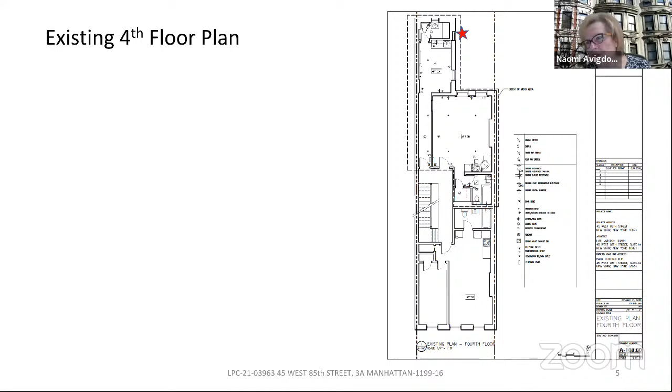Can I ask a question? Why couldn't you move the stained glass window to another window in the apartment? I don't have any other windows that need replacement. In order to move it, I'd need to fix the window, and to fix the stained glass window is $4,000. If that stained glass is 100 years old, then it's all leaded, and it might even cost more because of that. Okay, I don't know, they told me $4,000.

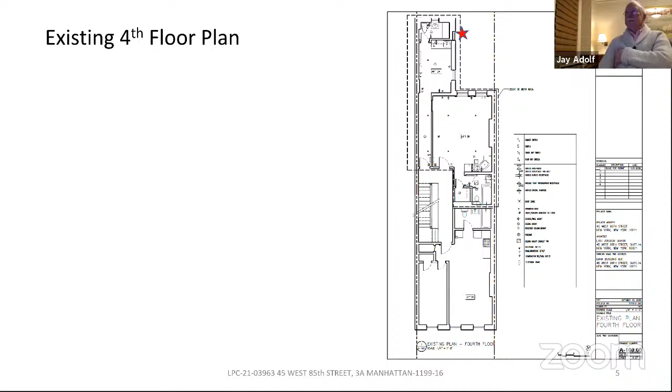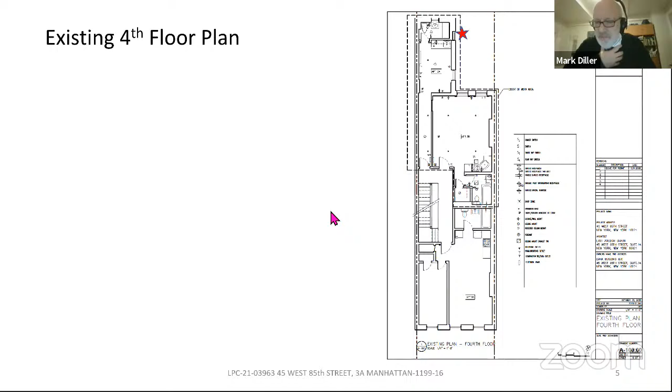I'm still a little unclear, so will the window be salvaged or just tossed? No, I'll put it in the basement and wait for the money. So you would make it available to somebody who wanted to make use of it? Yes, I would definitely do it, if they would pay what it costs to make it operable.

Okay, thanks. Isn't there also that place in St. Louis, like the City Museum, the organization that buys these windows? Is that where it was, St. Louis? I think yes, it was St. Louis. Was it St. Louis or was it Kansas City? Something, well, it's basically the same thing. I want to take my words back.

I'm not sure I want to give it away, because if I one day decide I want to use it, or maybe my kids want to use it, I don't want to commit to giving it to somebody else. Right, of course, got it. So I don't want to commit. Of course, and that's beyond our scope anyway, that's their business.

Okay, other ideas, thoughts, feelings, inclinations? Are we okay?

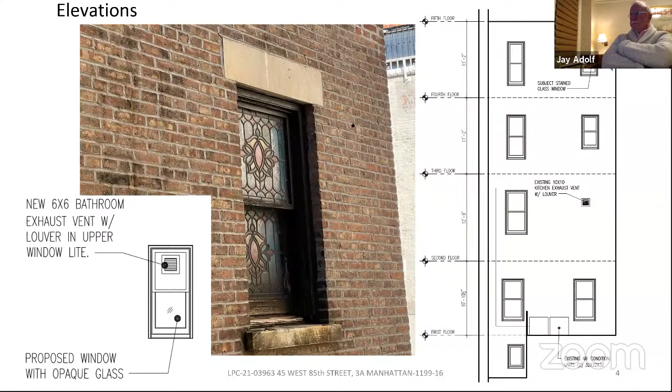So I sense we'll do a resolution to approve, and if somebody asks us from the board what's going to happen with the window, we'll tell them the tenant's going to keep the stained glass, to be retained for use at another time, if appropriate. Can the resolution reflect that we request, but don't require, that they preserve it for future use if possible? Something like that?

Doug, you going to say something? As a non-committee member, I am sensitive to the number of times this applicant has spoken about financial hardship. My understanding is that's not something we're supposed to take into consideration, but I understand it very well. I also understand this window is minimally visible, but it is beautiful, and I am heartbroken that it's going to be removed and replaced with an ugly louver. If the understanding is you're removing this for ventilation in the bathroom to prevent mold and mildew, which is a code requirement anyway, why can't this be a vertical duct to the roof that's not visible, keeping the window there, unless it's dangerous and falling apart? There's got to be other ways to mitigate condensation and humidity in a bathroom other than taking out a beautiful stained glass window.